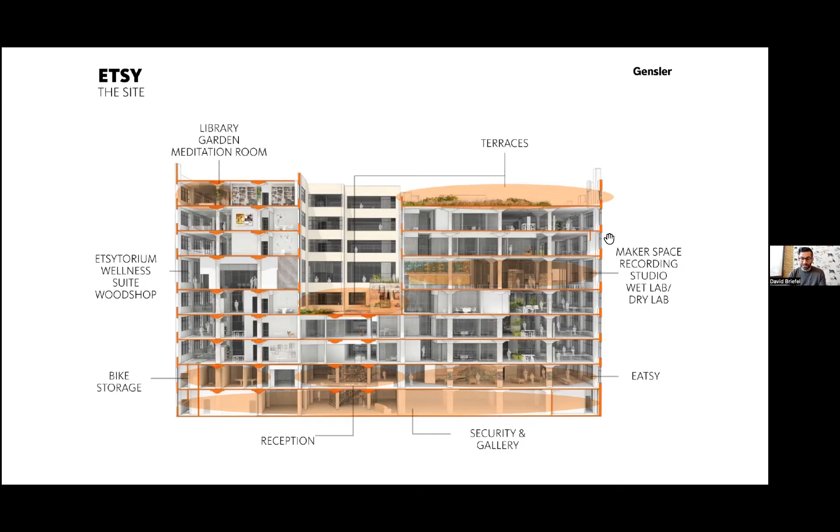The project was really unique in the way we started out and the way we engaged with their community. We did a ton of visioning with them, and they had such a strong ethos. We really wanted to capture that and make sure it was communicated in the design.

So in order to talk about the Health Petal for this project, I'm going to tell it using 3 parts. One is designing for daylight and views. The second part is programming for health, and the third is materials, makers, and education and advocacy.

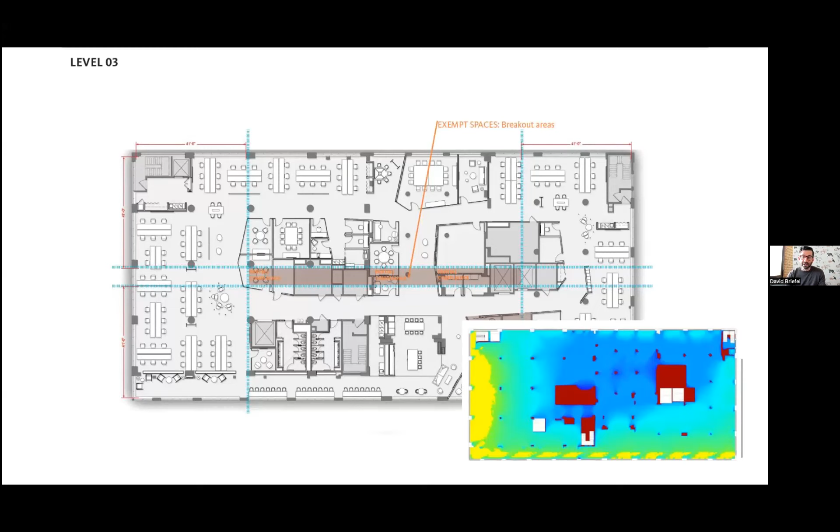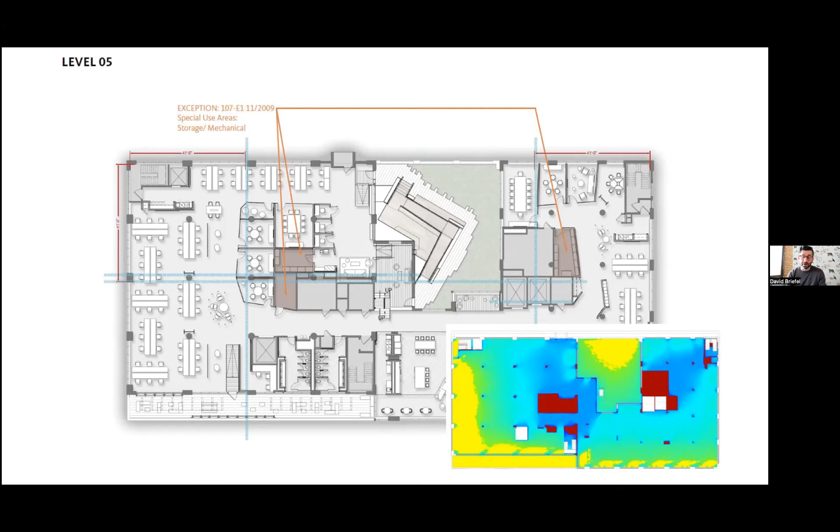So the second part is really talking about programming for health. Through early design concepting, we started to look at a couple of key components. We were looking at the open and closed collaboration space. They're a tech company and wanted to make sure they could bring people into this space, but still had privacy in their closed collaboration areas.

We also always talked about the importance of food at Etsy and the communal areas that happened around food, and the access that people had to it. So it became a really strong central planning principle.

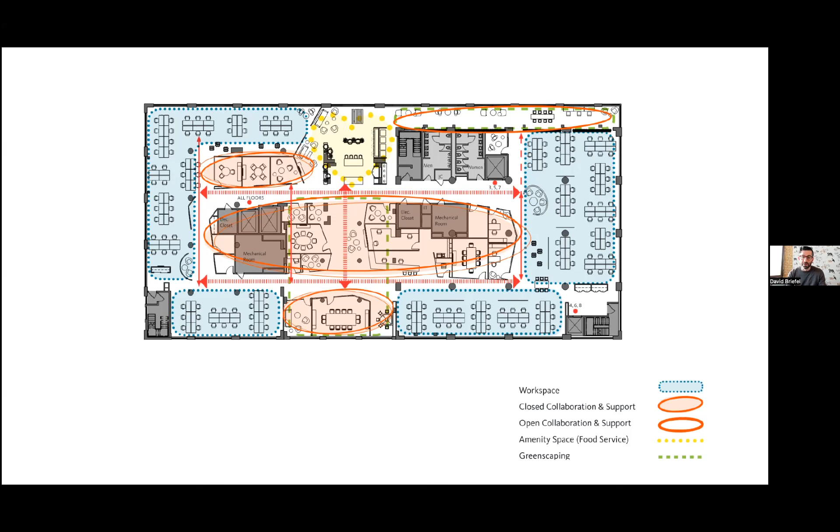As we got a little bit further along, we started to layer in other components like a very robust local art program that they brought in, as well as access to greenery in the space and views to greenery outside the space. One of the key planning principles was to make sure that everyone from a seated position had access to a view of some interior greenery. You can imagine that was quite a bit of planning to think about where this would go and how you might situate that kind of programming.

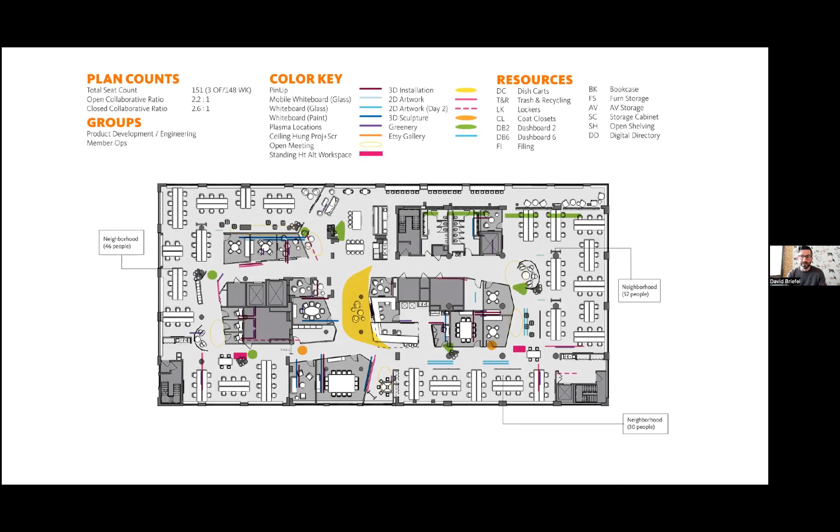We also included programming that was really important for them, to have an entry that would bring people up into the space from the ground level and really encourage people to use it. The stairs were built from reclaimed wood from a water tower on the existing building.

They also have a wonderful food program, which they offer, I think, 2 or 3 times a week. It's been a little while since we completed the project and I've been over there to get food, but it's a fantastic food program, local organic food. The rest of the days of the week, they really want to encourage their employees to get out into the community, also move around, but give back to their community and not be insular.

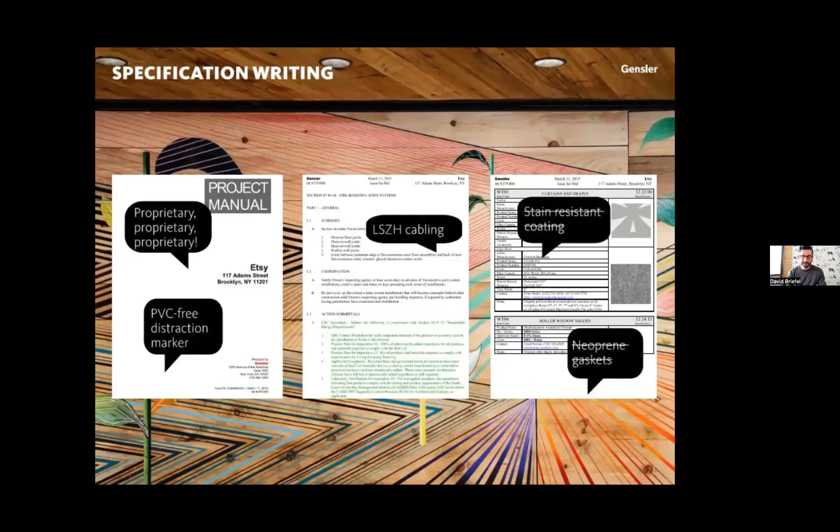We brought in some other folks. FSC came and talked to them, and we went through all the requirements in detail and made sure that they really knew what they were doing and didn't have any questions, then worked them through the requirements. As you can imagine, we also had to write our specs so that they incorporated all of this language, so there's a big spec editing process that went along with this project.

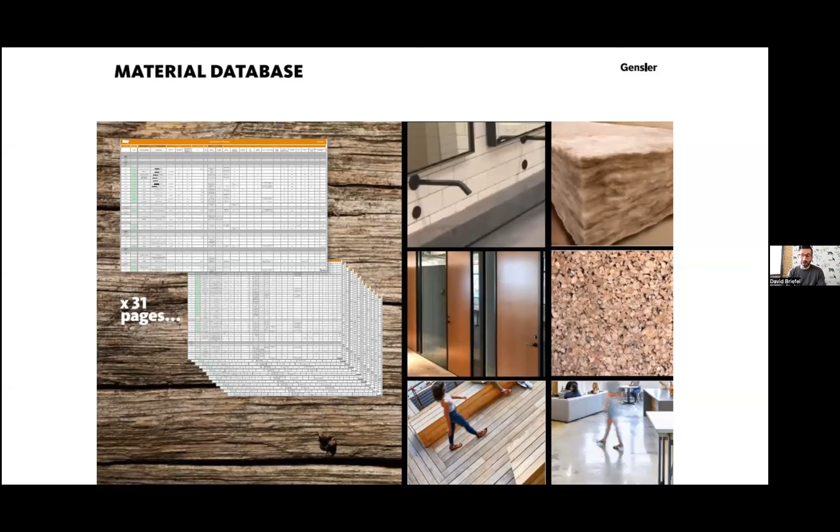Altogether, because of the scale and size of this project, we had about 31 pages of materials, over 1,000 materials that we were tracking. And this resulted in some really amazing reuse that you can see here, compliance with red lists and local manufacturing.

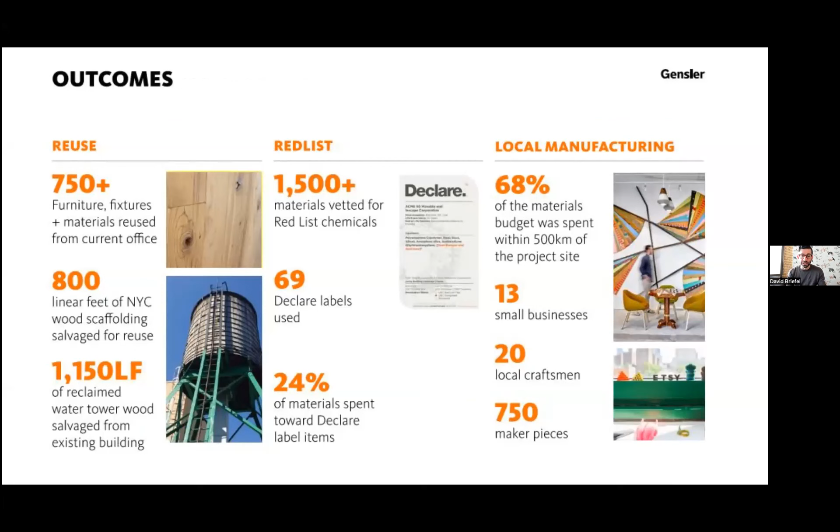And then when we talk about project impact, this project obviously impacted the people that worked at Etsy, and we got some really amazing feedback from folks after the project was done. You can see that they appreciated the project. We also did some informal surveying and looked at their Instagrams to see who was posting what and what they really liked about it, which was really interesting.

But I think just to bring this full circle, one of the things we talked about with Etsy very early on with Josh Wise, who was their facility director at the time, was that one of the reasons they engaged Gensler is because they wanted to make sure there was a mutual learning process and that we also benefited from the project. So as they pushed on the project for themselves, they were also pushing us, and we would then in turn learn from that project and spread it around.

And I think the example of our Gensler product sustainability standard, which will go into place in January, is a really good example of this, where we can draw on some of our experience from Etsy that was fundamental in getting us to this place of being able to have a standard that we can offer. You'll see if you look through it that CDPH is one of the things we track for a bunch of material categories. So with that, I'll stop here and thank everyone for attending, and turn it over to the next presentation.

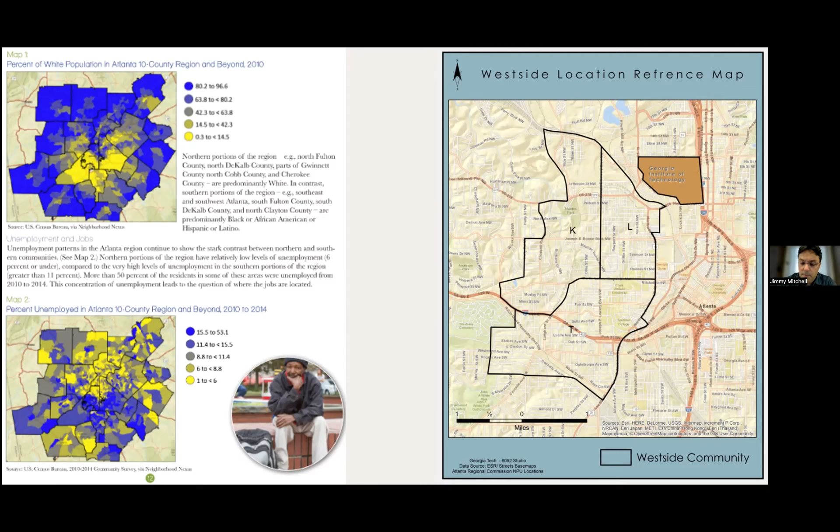Over here on the right-hand side in Atlanta, we call them neighborhoods K, L, and T. They're zip codes that have been going through some issues and blight over the years. Georgia Tech does have hundreds of people employed from those neighborhoods, but as a percentage of all the folks they hire, it's probably lower than it needs to be. So Georgia Tech has been focusing on trying to engage with that community, both in terms of students and employment on campus.

Just looking at the Black population, which is the majority of the folks southwest of campus—from the state of Georgia, over 30% of our residents are African American, and about 8% of Georgia Tech students are African American. Compared across engineering schools that's actually very impressive, but there's still work to do when you look at it compared to the state of Georgia.

So looking at solutions, Georgia Tech had a couple of faculty members of note: one is Michael Gamble, and the other is Jenny Hirsch. They really wanted to, especially given our civil rights history in Atlanta with Martin Luther King and others, do an exercise of additional planning around equity.

The Kendeda Building is really viewed as an asset in the community, and it encourages classrooms and students in thinking within engineering and design of how community assets can be improved. A lot of the students who have classes in the Kendeda Building will go out into other community members and improve on those existing assets, really in service of them.

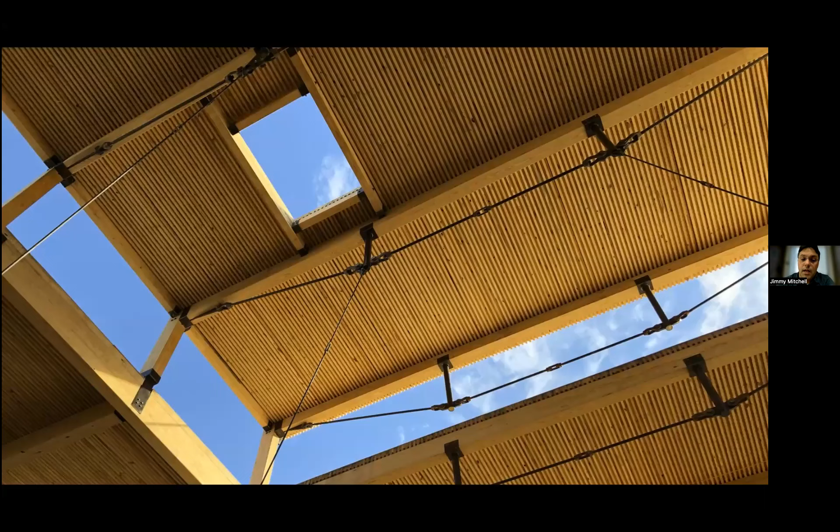This is a beautiful picture taken by Maki Kasiki right after the structure was done. What you see here is the glue laminated columns and beams and the nail laminated timber panels right after they were installed. Those panels are a structural 2x6 nailed to a 2x4, repeated throughout.

One really interesting thing about that: the requirement for the challenge made this needed to be FSC wood if it was new. But because those 2x4s were just spacers, they could also be salvaged.

As the leader of pre-con for the project, it was hard to get pricing to do these panels with FSC and salvage materials. So I made this mock-up here to help determine self-performing it and how it would be cost competitive. Ended up saving the project $800,000 by us doing it ourselves.

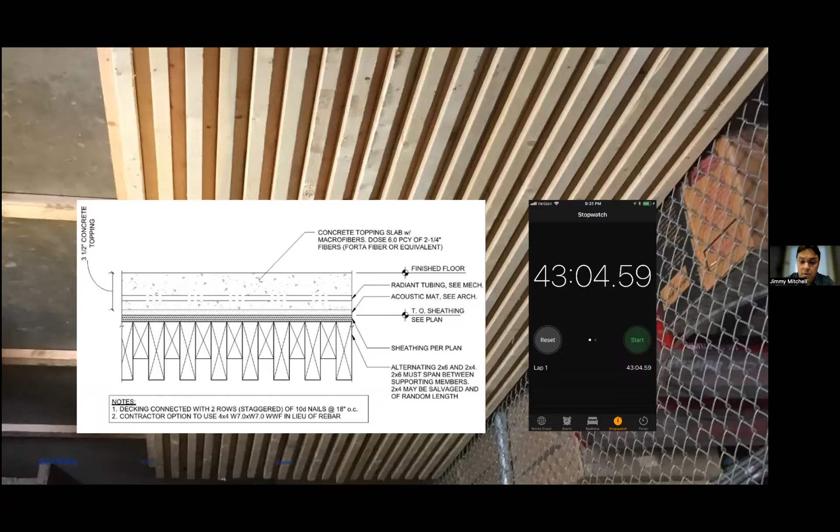One result of that was not only could we get the product that the design team wanted within budget, but we needed a lot of carpenters to build these panels. We built them on a table, one at a time, about 6 foot.

For 50 cents more an hour, we engaged with Georgia Works, a formerly incarcerated and homeless workforce development program for men. We trained 6 of them over the course of 4 months to make 489 panels.

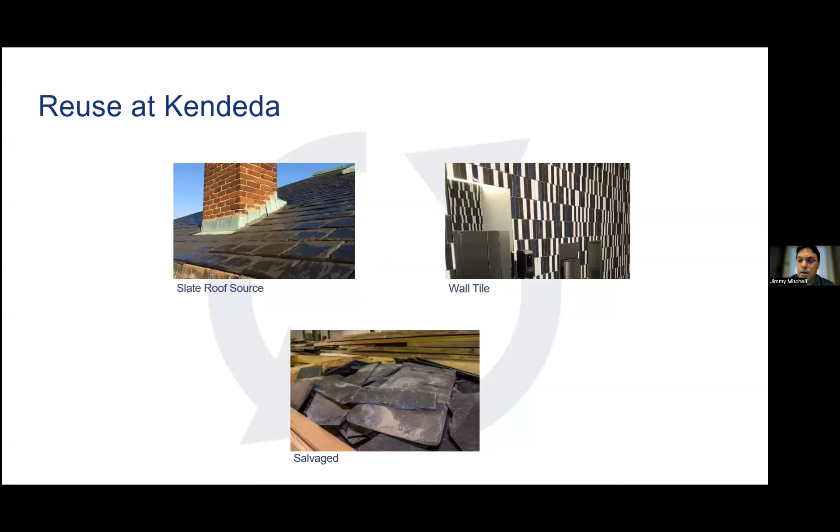Another great thing that's similar is reuse in general. I talked about the 2x4s and the panels where we collected that. We had 28 items that we salvaged at Kendeda, based on the 1 for every 500 square meter requirement. We needed 8 or 9, but we did 28. This is slate tile that we incorporated as wall tile.

The first building that Georgia Tech built was the Tech Tower. There was a renovation of that, and we got some of the old joist material and used it for the stair treads.

I mention this because a Life Cycle Building Center is a local nonprofit that was a great partner in the process of building Kendeda. Their mission is rooted in reuse of construction materials, and they also engage with workforce development.

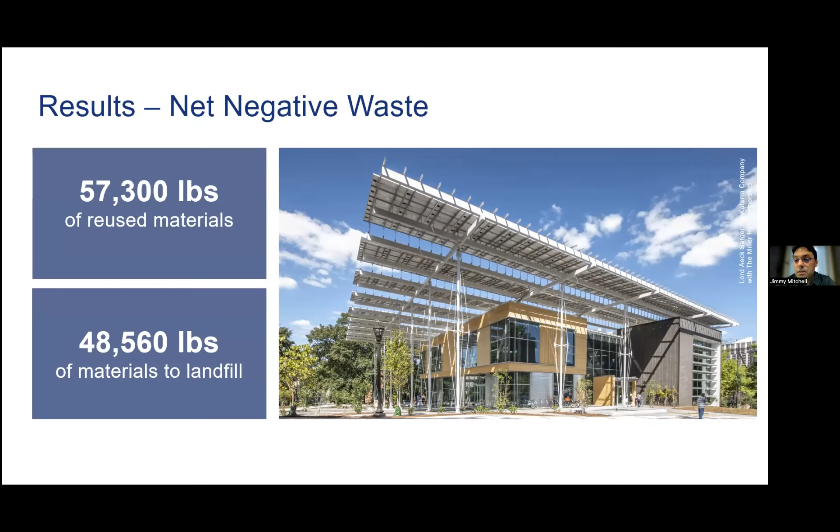One amazing unintended consequence is that at the end of the project, the weight of the material that we reused in the building was 57,000 pounds, and the weight of the material that we sent to the landfill in the process of building it was 48,000 pounds. So when we were done building the project, there was less material in the landfill because we built it.

Looking back into the future, that nonprofit Life Cycle Building Center still engages in workforce development. This spring in 2023, they formed a coalition of partners, many of which came from the Kendeda Building project, including Georgia Tech Serve, Learn, Sustain, and created a workforce program called Breaking Barriers. 20 folks entered a 4-week program, 2 weeks of soft skills training and 2 weeks of on-job training.

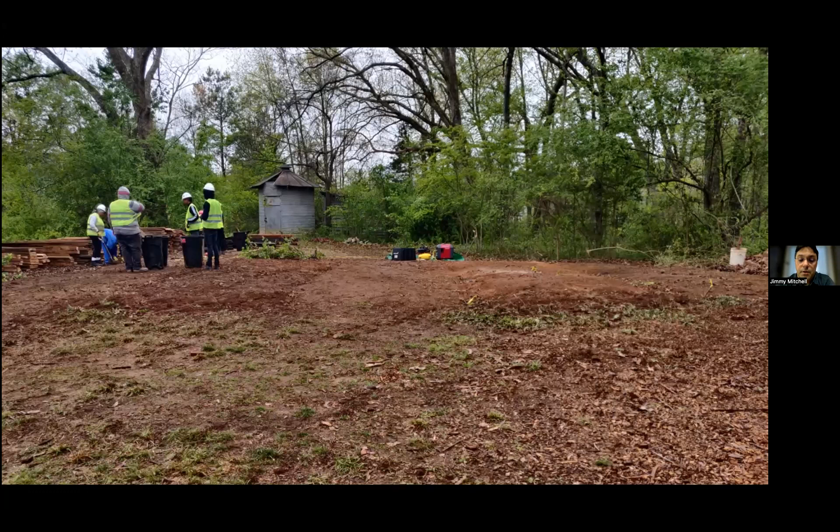This is them starting the barn deconstruction project in Roswell, Georgia, where they learned how to tear down a barn and save the materials for a future construction project, one board at a time. This is the picture after they're done getting rid of the barn. It was a full structural deconstruction.

There is no barn there now, and the Kendeda Building hosted their graduation. 12 of the 20 made it through the 4-week program, and a couple of the women in the picture now have full-time jobs at Life Cycle Building Center. The gentleman, Eric, on the far right is an advisory member at Life Cycle.

So again, it was great to have this. The Living Building Challenge really encourages reuse, and that seems to be an imperative that has a nice connection with equity and workforce development. So that's all I've got.

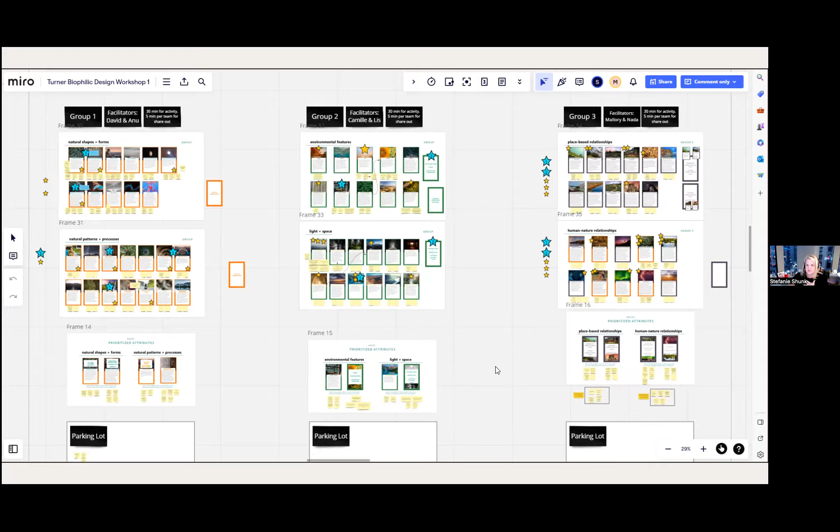As part of the second session, we also brought in some different project experts. One was Eric Sanderson, a historical ecologist who was able to share New York City's ecological history and inspire our conversations. Rebecca Boline, founder of Greenery NYC—we ultimately, as a result of her participation, hired her as a consultant, and she did all the greenery on the project. She also completed the Etsy project that David presented earlier. She's been a great partner on many projects. And Christina Grace from the Food Print Group, which gave insights around food.

In that second workshop, we revisited the overall biophilic mission statement. Eric spoke—we actually had all our speakers in this session, partly based on availability. If you're doing these, sometimes it's good to break them up, but this is how it landed for us. It was a really great, inspiring day of open conversation, and we moved into more co-creation, focusing on how it could really take effect in the design.

And Lisa, if you'd like to share the mission statement. Yes, I'm going to read it directly the way it's on the screen: The Turner New York office will be an inclusive haven that actively cares for employees and the environment. By implementing biophilic design attributes such as integration of plants, natural light, views and vistas, geographic connection to place, botanical motifs, bounded spaces, and age change and patina over time, the Turner New York office will be an engaging, energizing, and enjoyable experience that fosters inspiration, collaboration, and connection.

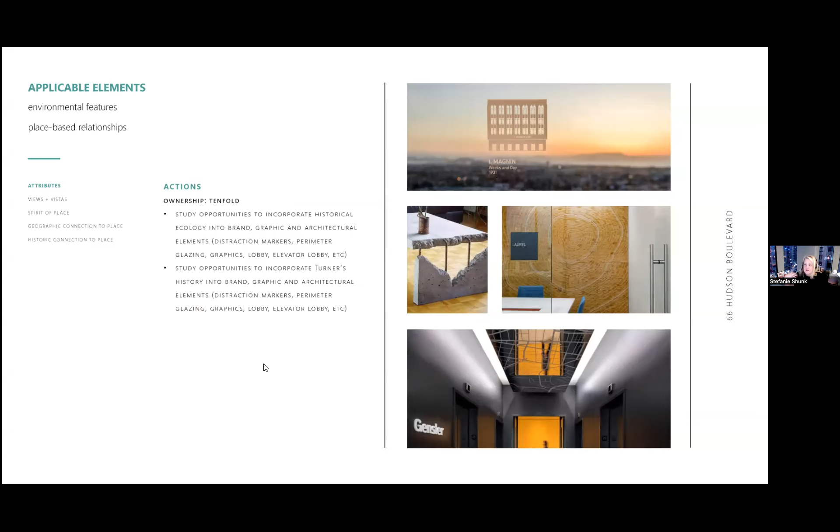Tenfold was focused on our environmental graphics and visual communication. These were some of the inspiration images, looking at how the ecology of the brand could take shape within the space and inform those layers—how we could take a look at different natural patterns and ownership of what that meant with Studio 397 and Gensler, as well as through different aspects of the lighting. And then Lisa will take us through the next few.

For this one, the environmental features and light and space, locating the plants. The action was taken by Greenery NYC, which was awesome, and Lumen, Studio 397, and Gensler to select products and to consider what planters we would use and how we would filter light through those plants.

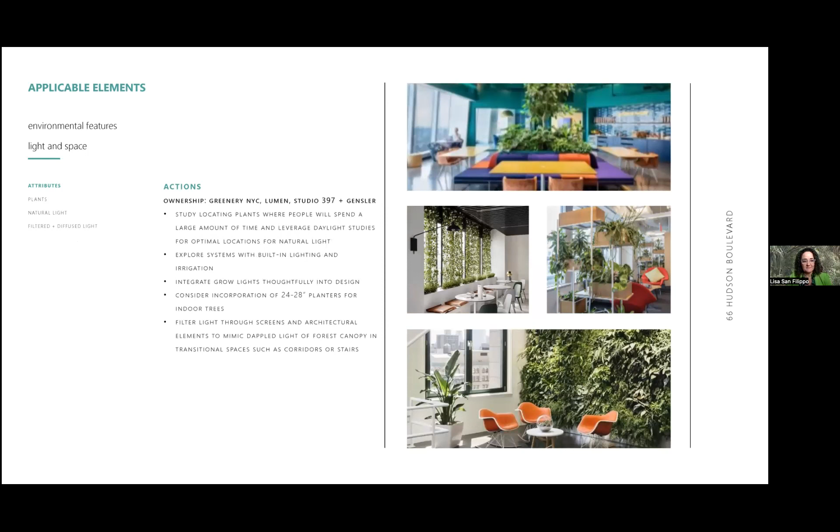Next, this one is about human nature relationships and natural patterns and processes. Like our quest for continuous improvement and testing new things out, design and build for future, our group wanted to include change and metamorphosis, like the age, change, and patina of time. So Greenery NYC was tasked with species and plant placement, allowing for growth and change over time, and Studio 397 and Gensler owned finding the finishes and furniture that shows this.

For natural shapes and forms that mimic nature, the desire for Turner to offer the proven benefits between human and nature in our workplace was evident when this element surfaced as a priority in our biophilic design strategy. Lumen took the lighting elements for their action, and Studio 397 and Gensler focused on natural shapes and forms with the finishing selections.

Here we're showing the successful implementation of the biophilic elements of lighting and ceiling finish to mimic a forest canopy, the natural wood slats with a forest image behind it to simulate trees, and the greenery throughout to feel as if you are sitting in a park connected to nature. This happens to be my favorite space.

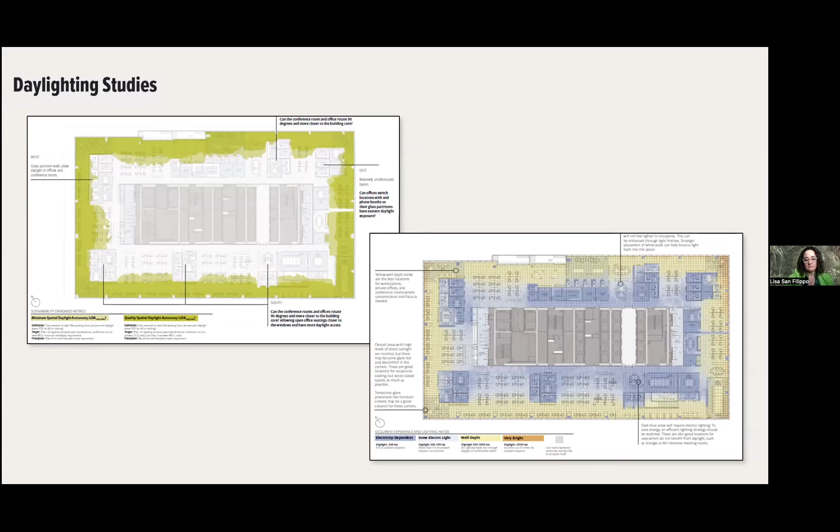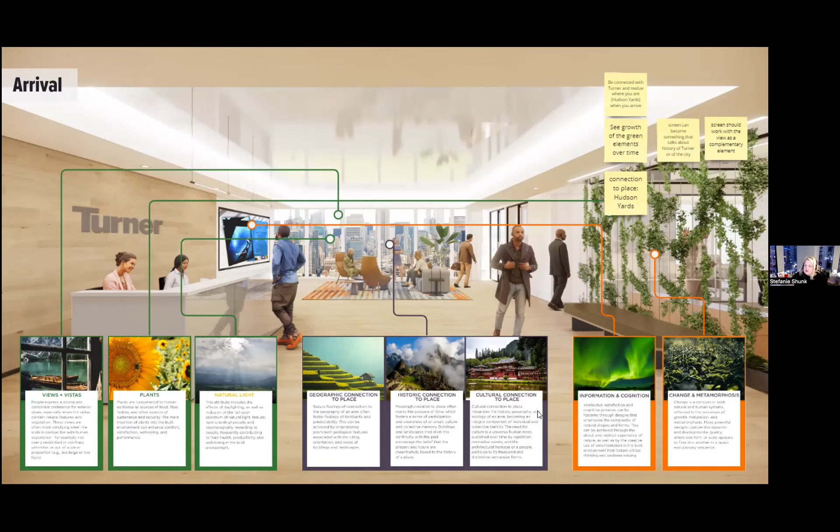As we looked at arrival, this was a rendering as we started developing more around vistas and views and the things that came from the different attributes that came from the overall workshops, and how that really started to come to life in the overall context of the space, and how we started looking at the naming conventions of the rooms, with the Central Park conference rooms and the amazing backdrop of the city for this office, as well as the focus rooms.

Looking at pattern and how we started layering in different materiality and choice within those environments. The overall vistas and views, again, from all workplace with natural light coming into the space, but again, just highlighting the spatial variability, plants, geographic connection, always having a sense of where you are in the environment.

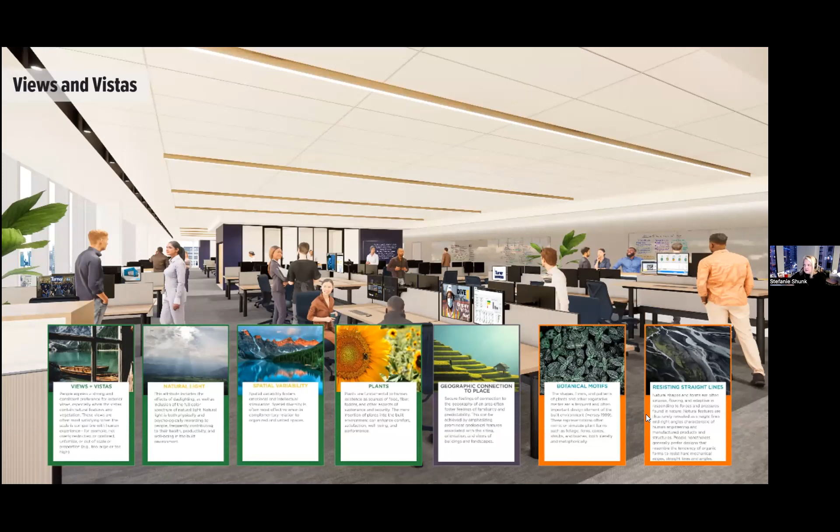And how that really tied into the overall workday, always having a place where your eye can go out and just take a moment in the context and craziness of New York City. The integration of plants and depth and views.

And again, spaces that really were for everybody, offering those types of choice and not reserving a view for certain people, but always making access for everyone, and the way the natural light comes into the space, and areas for team building where they do lots of different gatherings.

And here, Tenfold used our exterior windows to frame and display Turner's landmarks, sprinkled throughout the office space to honor Turner's work and to connect visitors to Turner's history and to learn about the city. It's really a great example of geographic connection to place, climate, and culture.

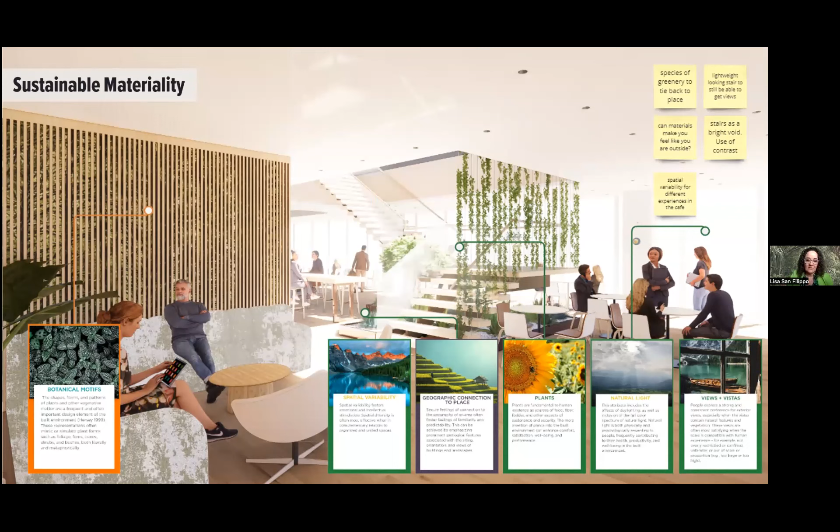The image from the Miro board during our workshop, the sustainable materiality included in the botanical motifs, are plants, natural shapes and forms. The climbing plants that grow and over time change, all selected to make you feel like you're outside and to create areas that allow you to experience the space in very different ways.

And here, because of the natural wood and metal, the plants give our employees a feeling of satisfaction, inspiration, and well-being, and it represents that patina of time.

And then here, this is the heart of the office, our work cafe. It's a bustling hub with a feature stair and a variety of seating options that supports wellness and serves as a space for informal gatherings and events, like the material selection and plants by Greenery NYC, and plant species selections change over time.

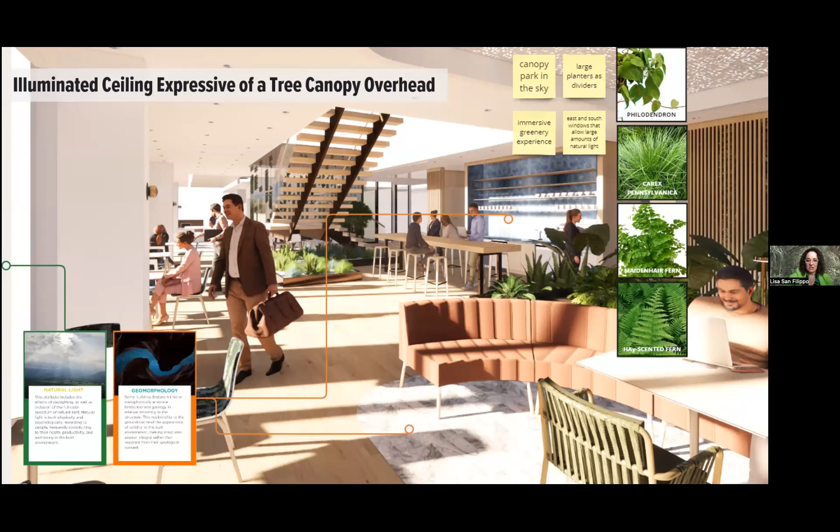And then the lighting in the ceiling here and material selection contribute to Turner's Park in the Sky. This happens to be my favorite space in our office. And this shows you why.

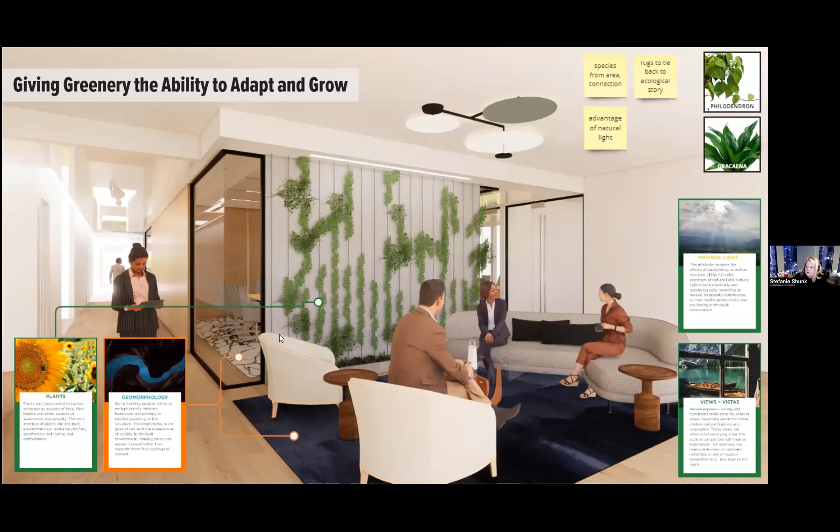Another snapshot from the mural board from the workshop, looking at the ability for greenery to adapt and grow, thinking about the integration of those elements. Here you're catching that snippet - the plants are alive and well, allowing for different breakouts. Also being mindful of the needs and respite of staff with a prayer room, a foot bath, and a mother's lactation room, just thinking about what people need throughout their day and how we provide that type of respite.

And a quote from Mike.

Whoa, I skipped our page. Oh, something happened here. I didn't see that we had a bit of a fail with our team page, but it was perfect last night.

Thank you - Turner's grateful to the amazing, talented, and diverse team that brought a unique, inclusive experience to the project from concept all the way through to completion. It made the process really exciting and very fun, especially during the biophilic design workshops, which happened to be my favorite two days of the project.

Thank you so much, Stefanie and Lisa, that was great. I really want to give credit to the team, so I'm going to pull over a PDF I had on the side.

Oh, Lord. Uh-oh. What happened? Everything just went black.